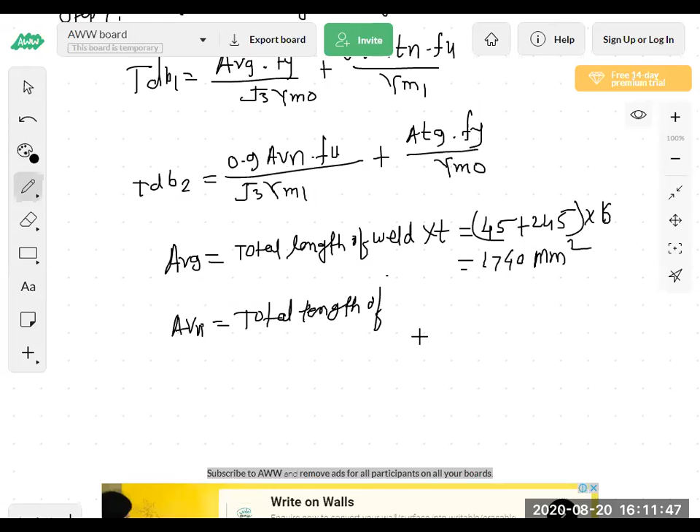Again, AVN is equal to total length of weld into T. So same value will be there, that is 1740 mm square.

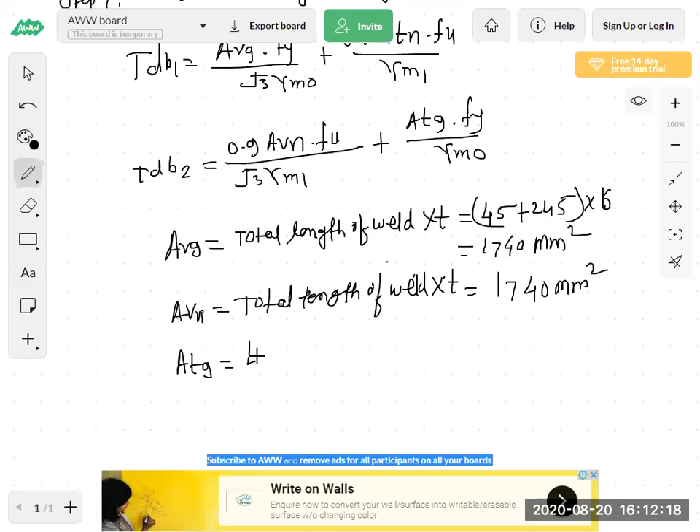Now next, ATG is equal to. So I have given formula for ATG, that is the ATG is the length of connected leg into T. So for shear we have to take whole length into T, and for tension we have to take only length of connected leg into T. So length of connected leg, how much length of connected leg?

Two legs are there. 70 mm, because our section is 70 by 45 by 6. So this leg we have connected, so length of this leg is 70. Simple.

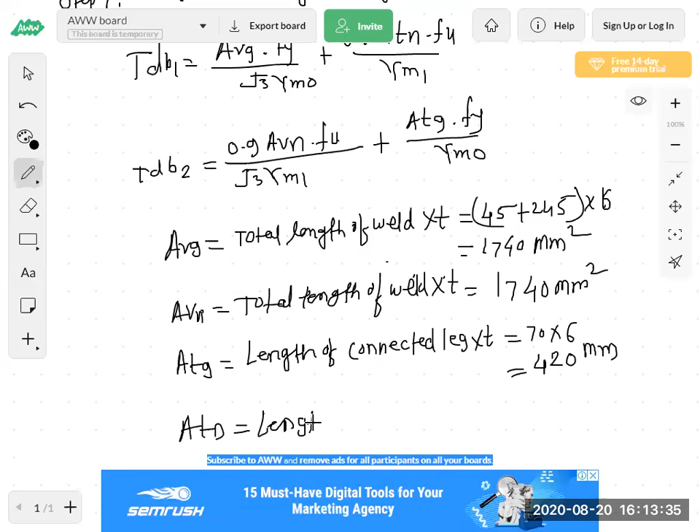So 70 into 6, how much? 420 mm square. And again, the last area ATN is equal to, again same, because there will not be reduction of the leg, so net area is again same. So length of connected leg into T, so same, it will be again same. This is mm square. So these are the 4 areas.

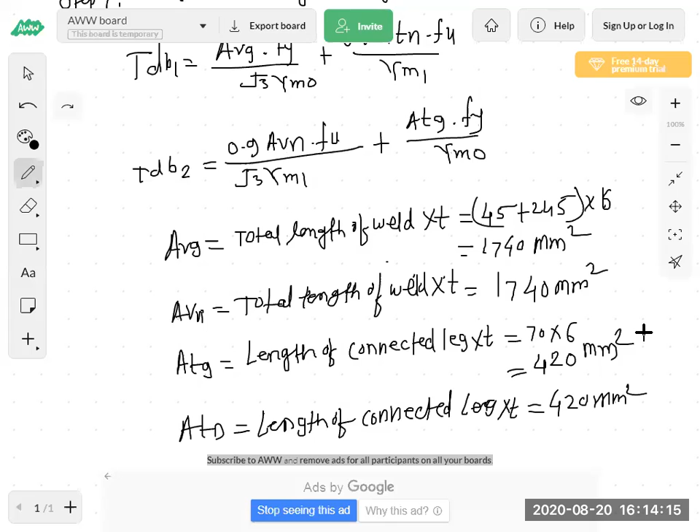Okay, now put these 4 areas into TDB1 and TDB2 formula. So TDB1 is equal to AVG. AVG is 1740 into FY. FY is 250 divided by under root of 3, gamma m naught, plus 0.9 into ATN. This ATN is 420 into FU is 410 divided by gamma M1 is 1.25.

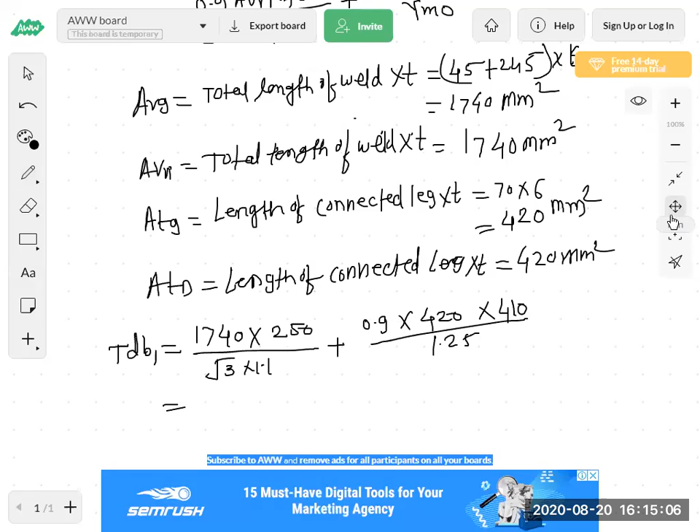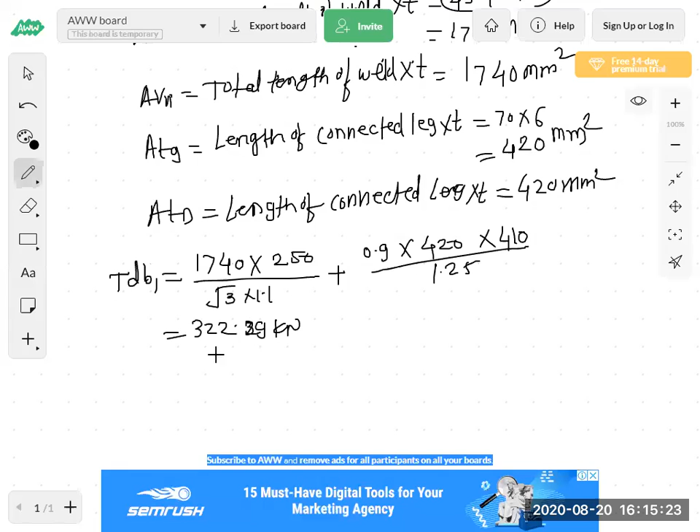How much? 352.29. So see, this is for one angle. 352.29 kilonewton, this is for one angle.

So if we multiply by 2, so 2 into 352.29, how much? 704.59. See, you can see here, I think 230 kilonewton is load coming on the member, and the load carrying capacity of this member is 704. It means very high strength they are taking in the block shear failure.

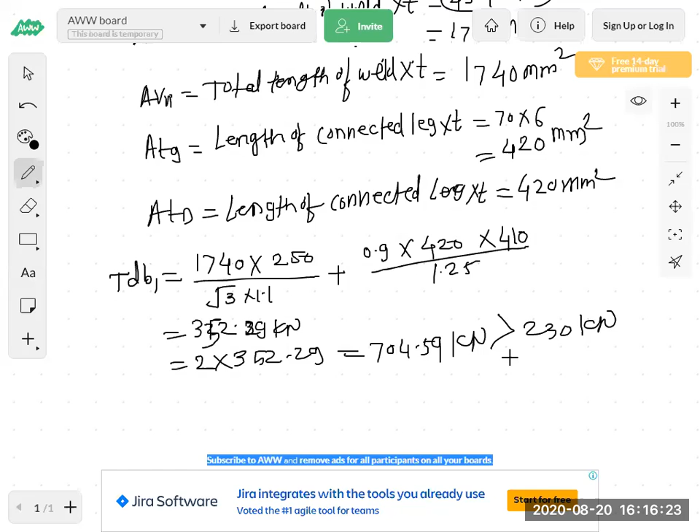So why I am telling you need not to calculate block shear failure, because the block shear failure in welded connection, the block shear failure strength will be very high as compared to the bolted connection. Are you getting? So here 4 times, near about 3, more than 3 times it is there. So need not to calculate in the welded connection.

So TDB2. Why it is more? Because the reduction of the area is not there. Block shear failure is, it means what?

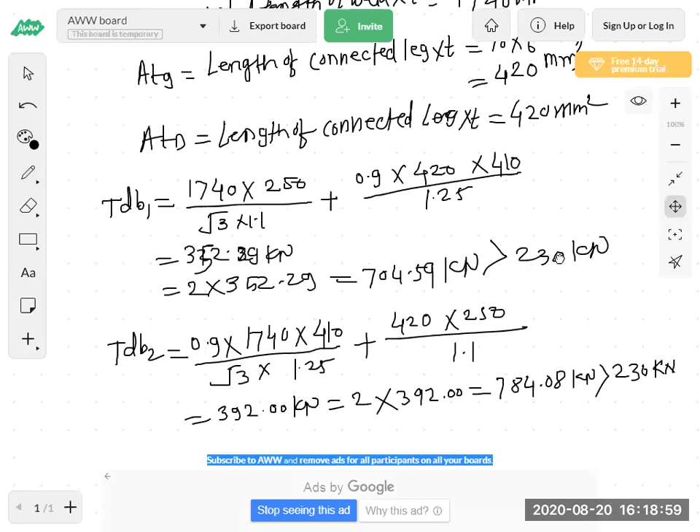It means again it is more than 3 times the load carrying capacity of this angle in block shear, more than 3 times of the load coming on the member. So that is why I am telling you the block shear failure will not come in the welded connections. So if you do not calculate this in examination, there will not be failure due to this. So you can solve only about two strengths.

So here we can write, hence safe, and so provide ISA 70 by 45 by 6 having Ag is equal to 656 mm square. Here we have to write two ISA because two angles we have to provide. So provide two ISA 70 by 45 by 6 having Ag is equal to 656 mm square each.

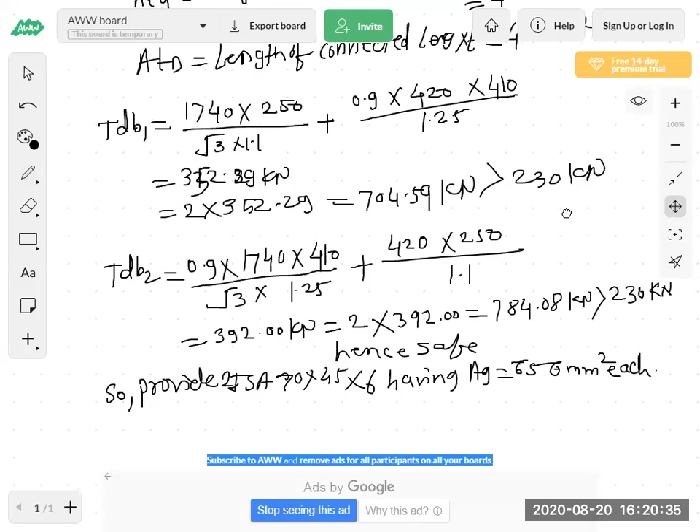So this is the design of the tension member. So here our 99%, this chapter is about to close. Just I want to tell you about one thing. Just a minute.

So we have seen here two examples on design of tension member. One is on the bolted connection and another is on the welded connection. Generally in examination, this type of design of tension member example is asked. Not load carrying capacity, but generally they are asking about the design.

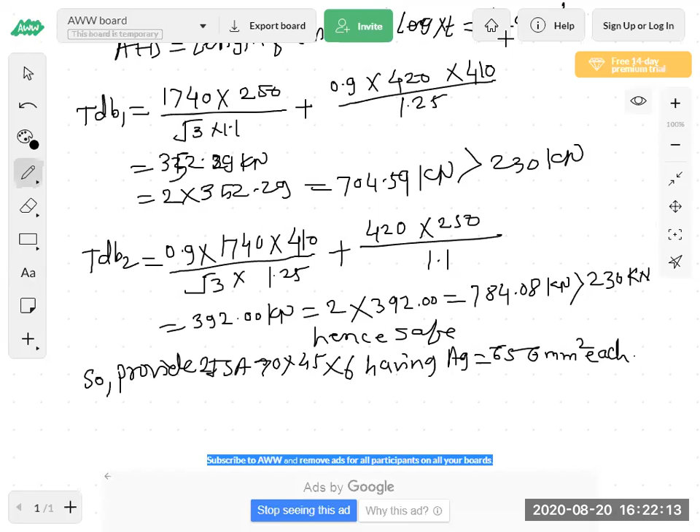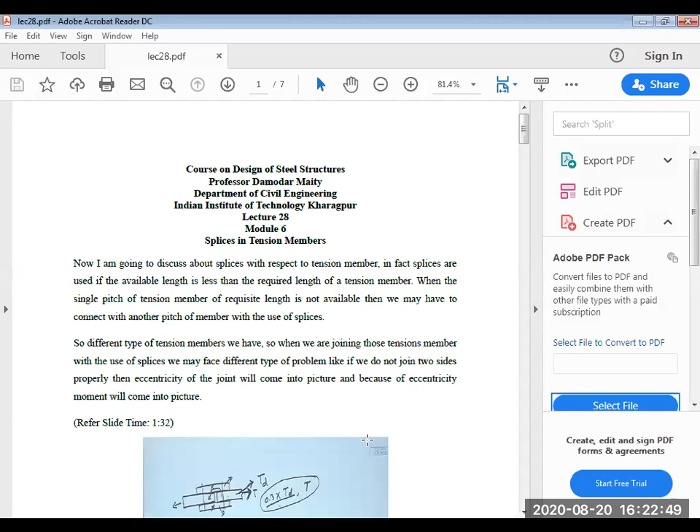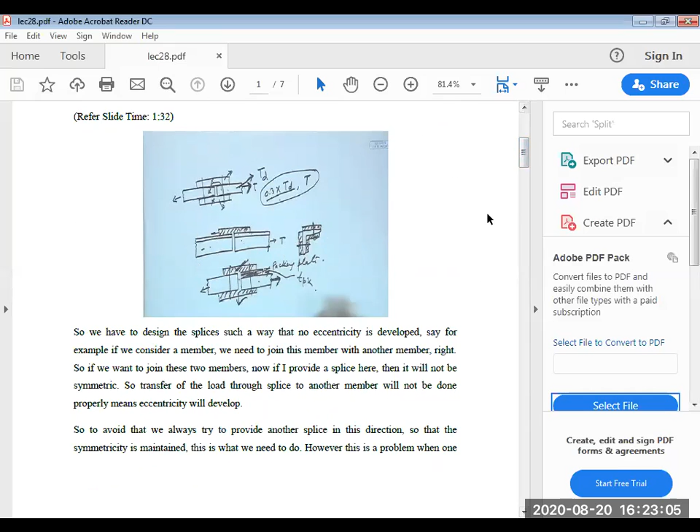Here is the last point of this unit: splices in tension member, meaning design of tension splice. You can see this splice in the tension member. So what is splice in the tension member? Generally splice in the tension member is nothing but where splices are used. I will show you here. The next point is this, just the last point, splice in tension member. It means if we are using angle, see this image.

Is the image visible to everyone? Yes sir. Okay, so what is tension splice? Tension splice is nothing but sometimes, if this is the first angle and this is another angle, if we are connecting the angle or providing the angle as a tension member, sometimes the angle has a limited length and we have to attach one more angle to the earlier angle.

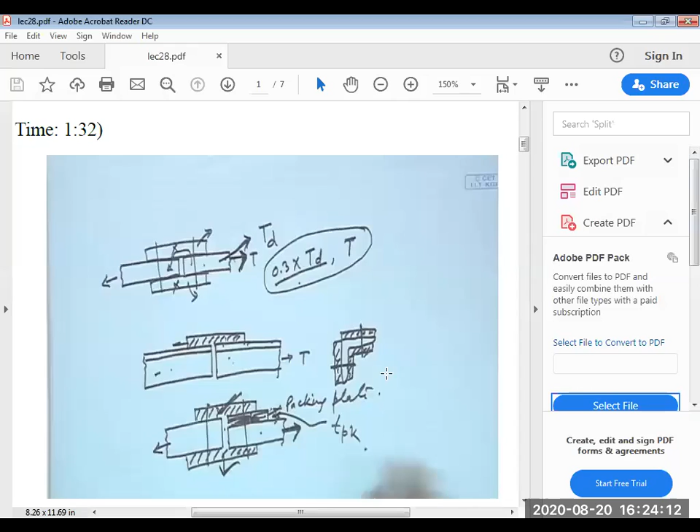It means we have to create a joint at this location. So for jointing these two members, we are providing one plate. This plate also acts as a tension member. So we are calling this a tension splice.

So if we connect two plates, then these are the two cover plates, and these two cover plates also act as a tension splice. Here these are the two angles in the second sketch, shown for connection of these two.

You have seen the rail.

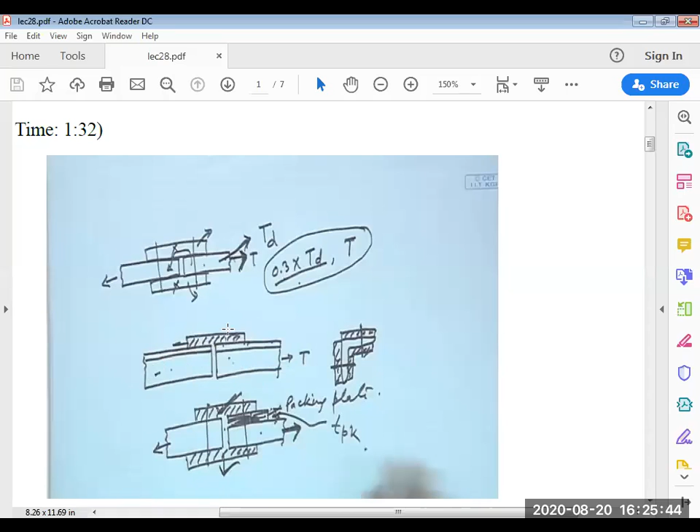And such plates we are calling as tension splice. We are calling it tension splice. So I have written here, this is the word splice. This is the tension splice.

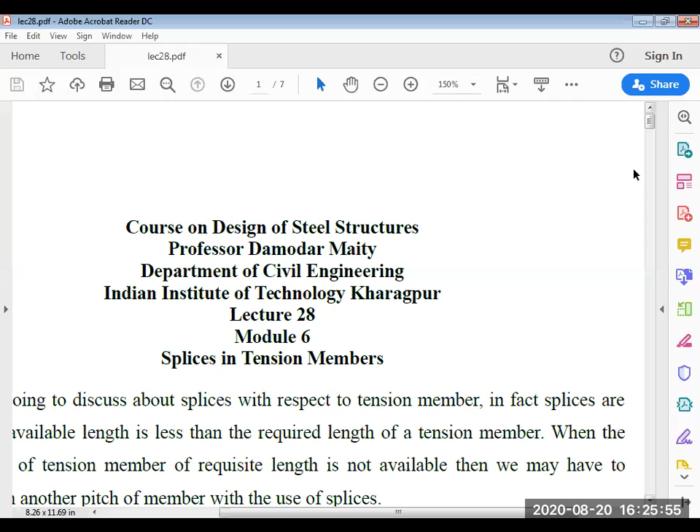So such splices are used here. When we are jointing those tension members with the use of splice, we may face different types of problems, like we do not join the two sides properly.

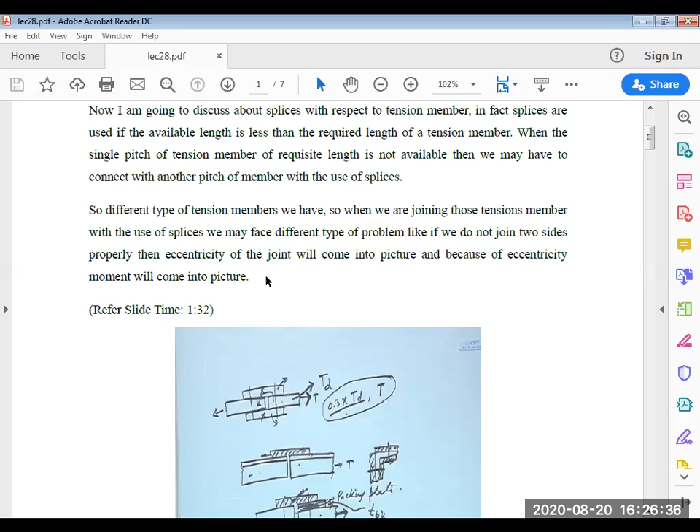Then eccentricity of the joint will come into picture, and because of eccentricity, sometimes we will not provide this splice on two sides. So we provide it sometimes on one side, and so the tensile force will be more on this plate, so we call that a splice.

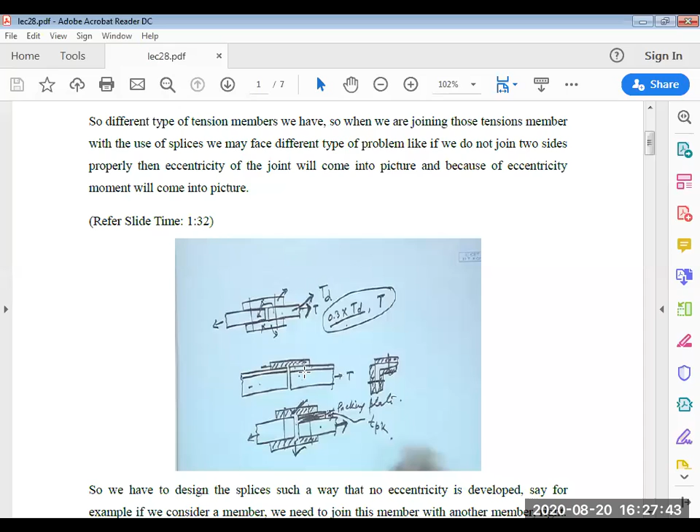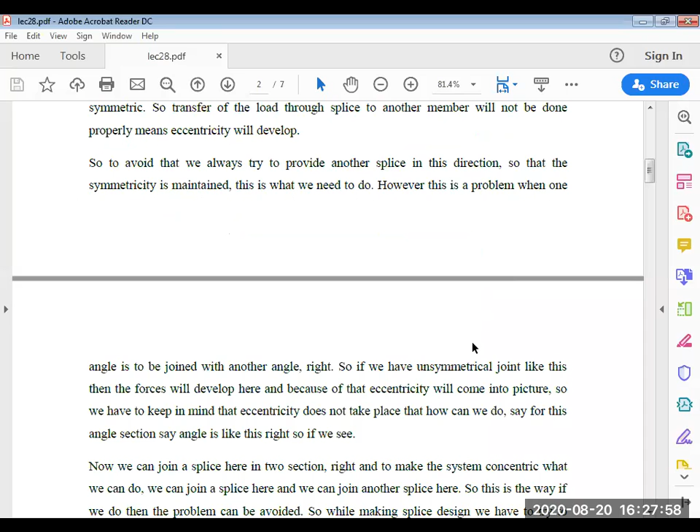It means when this particular member is under tension, this splice is also under tension, because this member is transferring the load onto this splice, and this member also transfers the load onto this joint. So there is a design for this splice, but in our syllabus the design is not given, only the introduction of this splice is given. The specific design of this splice, meaning how much load this splice will carry, we have to calculate separately.

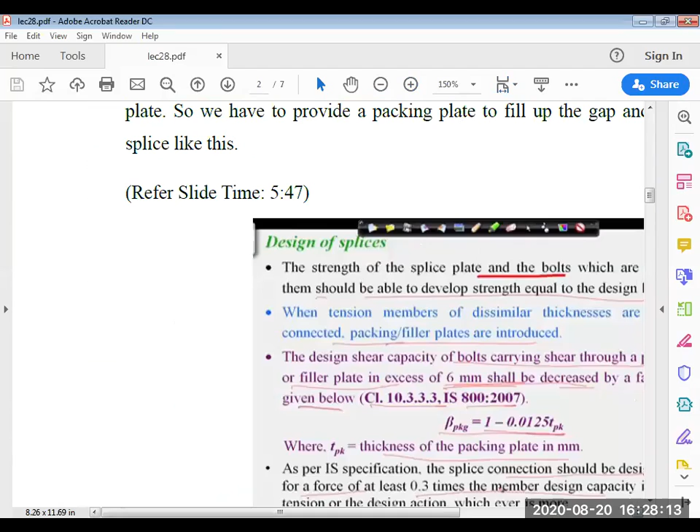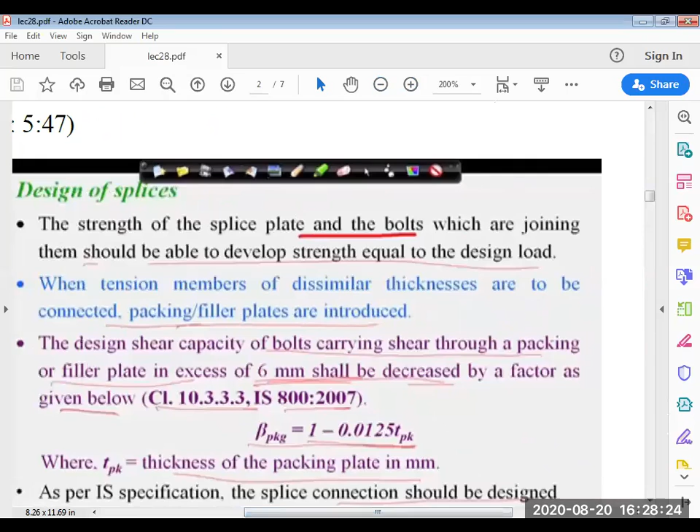Then here again we can see the design of splice. So how to design the splice, as given in this particular PPT: the strength of the splice plate and the bolts joining them should be able to develop strength equal to the design load.

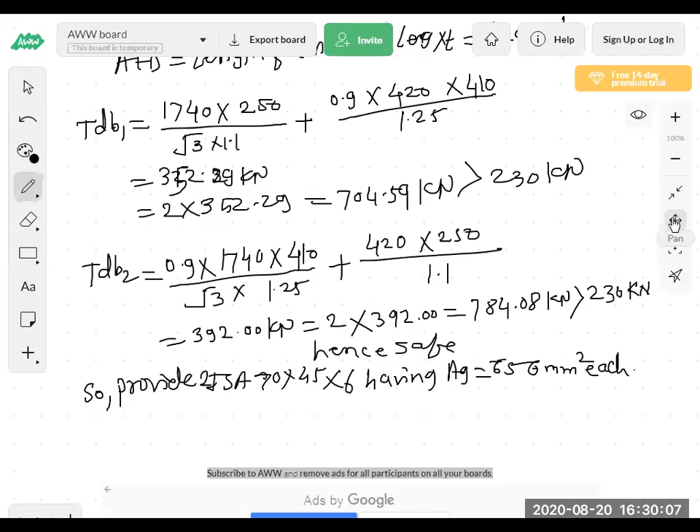So this is one plate, and here we have to connect another plate. If the thickness of this plate is 12 mm and the thickness of this plate is 8 mm, then a gap is there, and we are providing here...

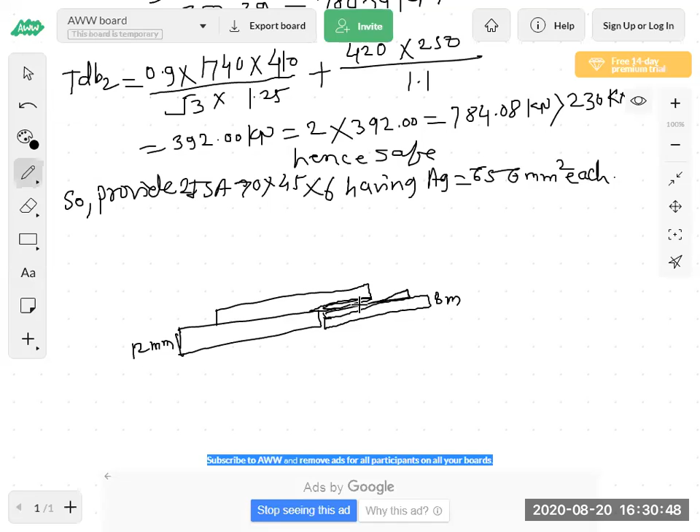So we have to provide one more plate here, which we call a packing plate. This packing plate is nothing but another tension plate. This plate's thickness is 12 mm, this one's thickness is 8 mm. Now will the 8 mm and 12 mm plates fit exactly face to face? No, some thickness will be less.

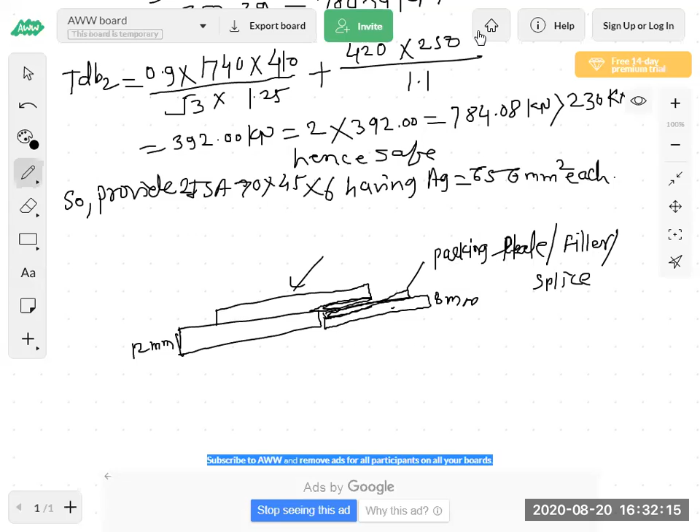So next is the design shear capacity of the bolt. Here also we have to find out the shear capacity. So the shear capacity of the bolt carries the shear strength of the packing or filler plate. Whatever plate I have shown you in the drawing, the shear strength of that plate we have to calculate, and in excess of 6 mm it shall be decreased by a factor.

The strength of this plate is decreased by this factor, beta pkg, which is equal to 1 minus 0.0125 t pk. Actually we use this formula in the design of tension splices, but in our syllabus they have only given the introduction, so we are not solving a problem on this. If we solve a problem on this, you will learn in detail how to calculate this factor, where to use it, and how the calculations are done.